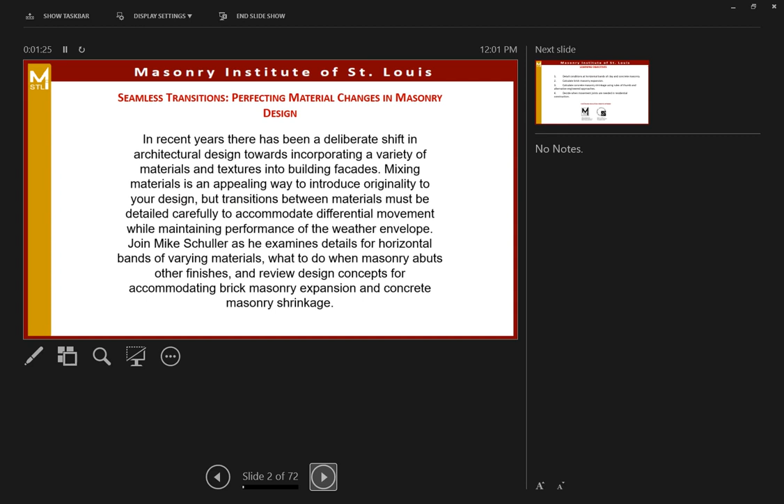We have our seminar on seamless transitions, perfecting material changes in masonry design. You can see this is our program description, it's right there in your packets as well, and you'll see our learning objectives. We're going to detail conditions and horizontal bands of clay and concrete masonry, calculate brick masonry expansion, calculate concrete masonry shrinkage using rules of thumb and alternative engineered approaches, and decide which movement, or when movement joints are needed in residential construction. This course is offered with AIA.

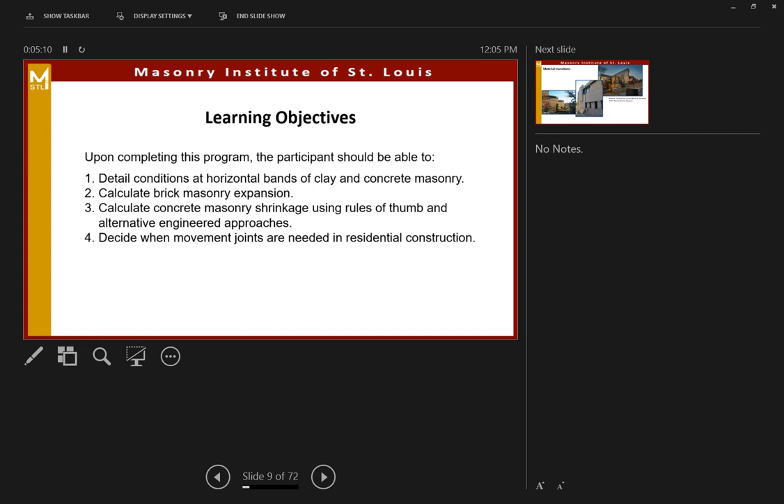That's important. So talking about transitions, what we do between different building materials, and we've gone through our learning objectives, we've seen that already, but I've got a couple images of some recent winners of Masonry Industry Design Awards. These came from the Mason Contractors Association website. And if you look at the winners in recent years, almost all of them have this mix of many different materials in their facades. So it's kind of a recent architectural style, last 10, 15 years or so, trending towards mixing these materials. So here we see stone, we see brick, we see concrete block in our masonry materials, but also putting in metal, wood, and concrete elements.

And you can do this.

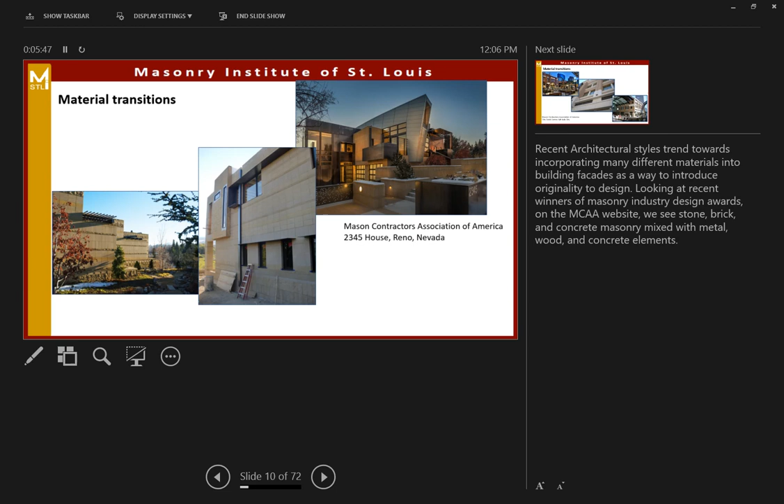You can mix these materials in these ways, and it gives a nice attractive appearance, but we have to be aware that there are some special design considerations to worry about. Our materials are going to move differently in response to temperature, moisture, and loads. Our job as designers is to be aware of these different movement concepts and detail our transitions to accommodate that movement, but also keeping water and air outside of our building.

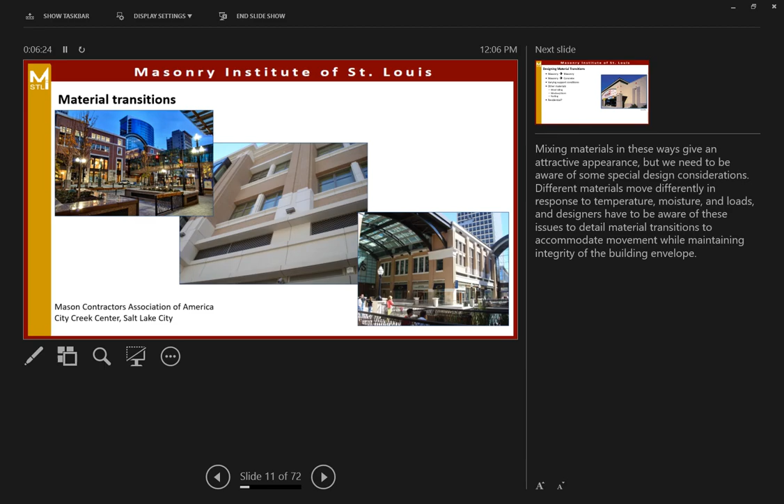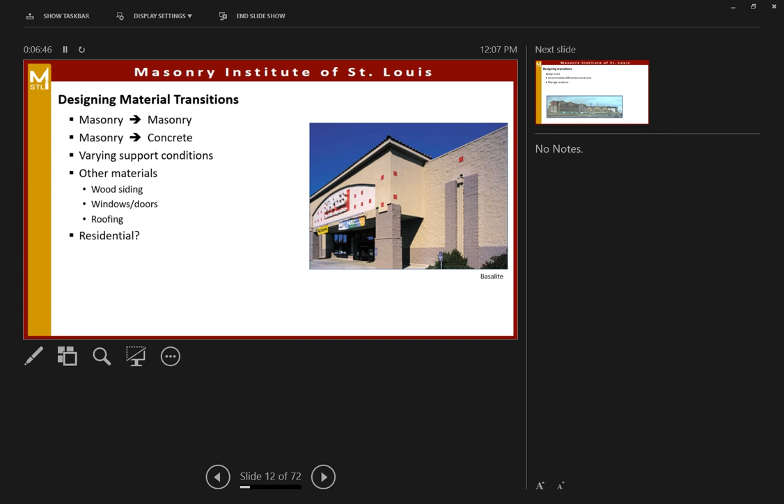So we're going to talk about detailing quite a bit today. Here's what we're going to talk about: different material types, transitions between different types of masonry to concrete, different support conditions, and a little bit at the end about residential, more of an editorial comment than a technical one. We'll get to that later.

So as I said, there are two keys to designing our transitions properly. We're going to accommodate movement, differential movement we call it, and deal with moisture. And we're looking at what is the standard of care these days, and what does the building code require.

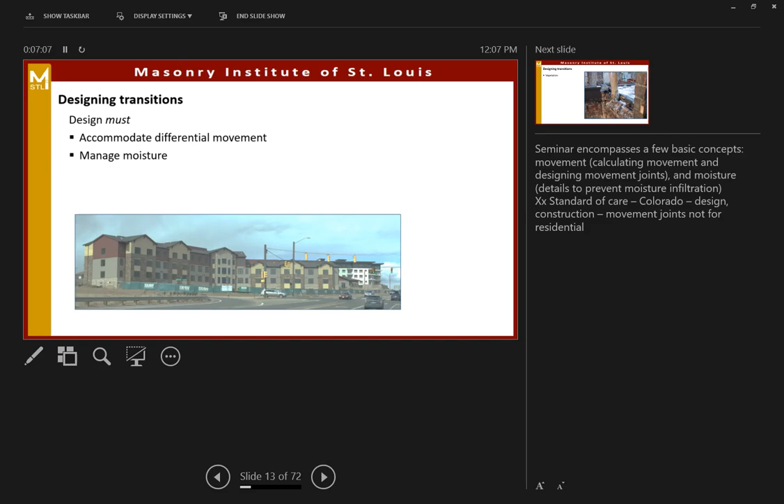We're not going to talk about transitioning to vegetation. We don't want to put these things in our walls. Gosh, I can't imagine what's going on inside that building. It's a garage, an old garage, but vegetation growing out of our walls.

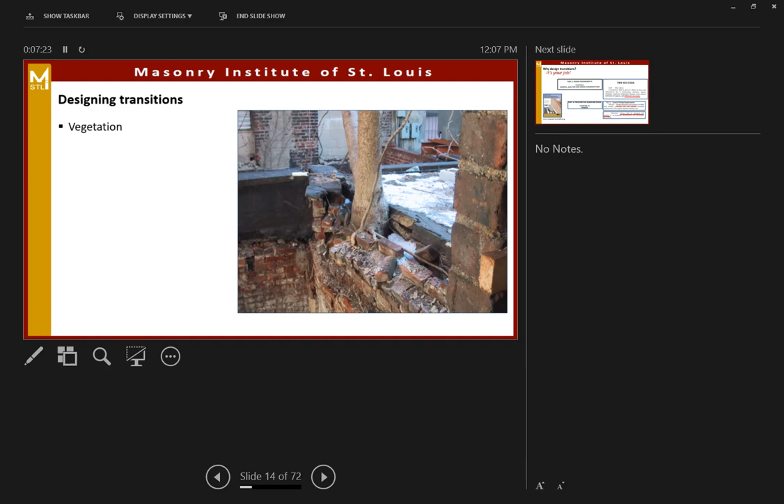So why are we designing transitions? Well, we do it because the building code says we have to. It's our job. There are three spots in the TMS 402 code, that's our building code requirements for masonry structures. We've got way up in chapter 4, general design requirements, it's our job to consider all these things, including differential movement.

And in chapter 13, this is our 2022 code, our veneers are in chapter 13 now. We're going to design and detail our wall systems to meet the requirements of the legally adopted building code. It used to be simpler — it used to say design and detail our veneer with flashing and weeps. Now we're just meeting building code.

We're also going to design and detail our veneer to accommodate deformations, differential movement. So we're doing these things because we're required to, plus it keeps us out of trouble. And we're going to spend a bit of time today on this.

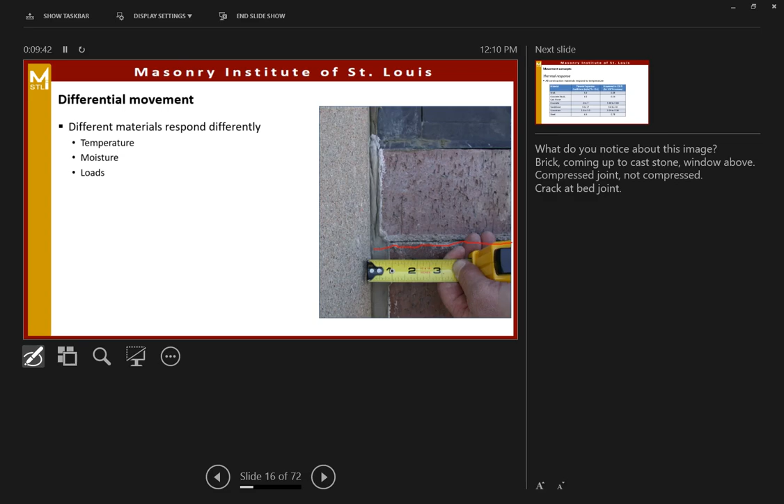The sill is moving separately from the brickwork below. So that crack can let in water. As long as we have our drainage cavity detailed properly, we've got flashing, weeps, and all our things down in the cavity, we can deal with that water that gets in at that separation.

So there are two main types of movement. Number one, we have temperature response — our building materials move in response to temperature changes. Here's a nice little table of different thermal expansion coefficients. These are in millionths of an inch per degree Fahrenheit. It's kind of tough to look at numbers.

We're going to look at this last column here. What I've done is put in a design temperature differential of 100 degrees Fahrenheit and calculated the movement in a 100-foot length of wall, just as a kind of realistic number. So our brick and our block under a 100-degree temperature change is going to expand about half an inch.

Concrete a little bit less. Sandstone has a pretty wide range of movement potential — it depends on the type of sandstone, if you have a quartzite binder or a clay-type binder. Limestone numbers come from the Indiana Limestone Institute. The brick and block numbers come out of the building code. So we have a range of movement, about a half an inch every 100 feet, maybe more with concrete and sandstone, limestones all over the place depending on what type of stone you have.

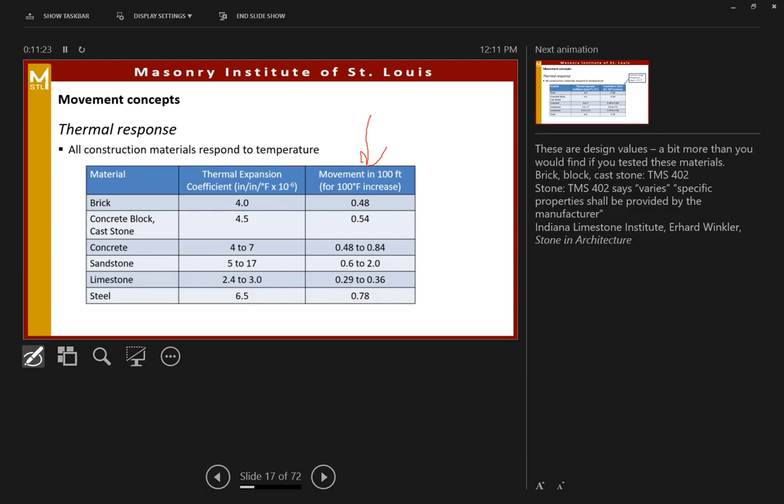Steel also moves in response to temperature. And if that steel is rebar encapsulated in grout inside our walls, it's no problem — the thermal expansion of the rebar is close enough to our surrounding materials that we don't have to worry about any cracking there.

But if something different happens, if we have our steel elements exposed to the exterior - I've seen this on supermarkets, here in an automotive repair shop - look at all those garage door openings, each one about 12 feet wide. We've got 1, 2, 3... we've got 5 of those, about a 60-foot run of steel framing there.

And the designer did a great job designing movement joints. We'll get into that a little bit later, but we've got movement joints. See the shadow lines at every little pilaster above the openings. So the brick's in great shape there.

But think about that steel lintel that is exposed to temperature. It's going to heat up and cool off much quicker than that structural brick around those openings. And so we're starting to see some movement, particularly where those steel beams are tied into the surrounding brickwork.

What happened here is we've got the steel shrinking and expanding in response to temperatures. The design had these rigid studs tying that steel into the structure around there. And if you look close, you can see some cracks. We've got cracks around here, we've got cracks around this location. So again, differential movement - steel is moving differently than the wall.

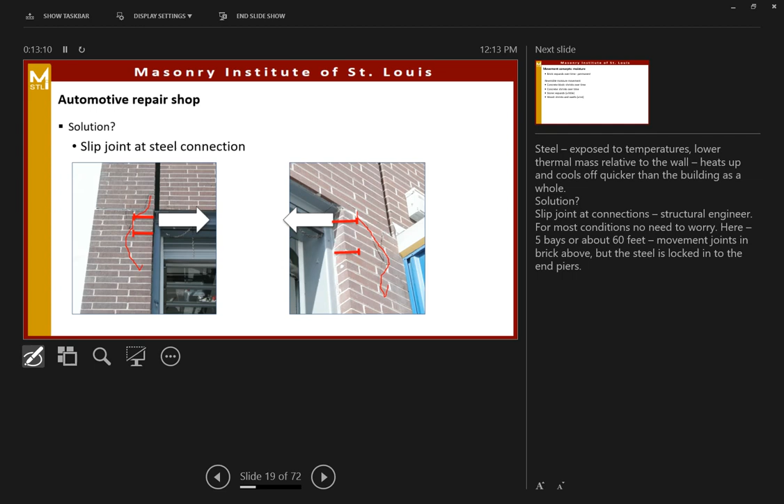What's the solution? Well, we came in and cut those studs free. Up here we put in a little slip angle connection, just a bearing seat for that beam, so that the steel and the brick above it can move independently back and forth, independently of the structure itself. So we've got to think about this - it does come up from time to time.

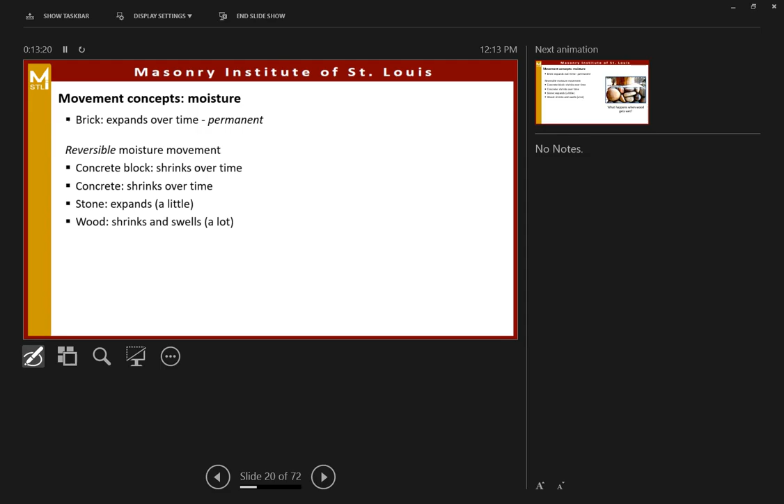So our cement-based materials have a tendency to shrink over time. As they lose moisture, as the cement hydrates, there's a chemical reaction with the cement that tends to cause those cement-based materials to shrink. So it's concrete block, it's concrete.

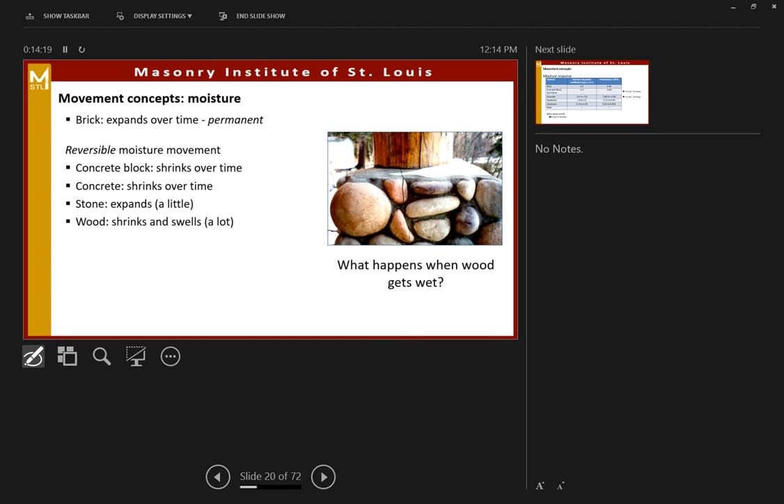Brick expands over time, okay, we know it. The second that brick leaves the kiln, all the moisture has been driven out by the high temperatures of firing. So that brick, once it's out of the kiln, is absorbing moisture out of the air, out of the environment, and it tends to expand more than you'd think. A little tiny bit, but more than you'd think.

So if we look at our movement concepts, our moisture-related movement of these different materials - our moisture expansion looks like this, a similar table. There's no temperature involved, but this is just inches per inch times 10 to the minus 4. Again, those numbers don't mean much on their own.

So let's look at the third column. If we have a 100-foot length of wall, our brick is going to expand a little less than 3/8 of an inch due to the moisture uptake. It doesn't ever shrink again - this is a permanent, one-time, irreversible expansion.

Block, concrete, sandstone, limestone - block and concrete tend to shrink over time, about the same order of magnitude, but instead of expanding like brick, it's shrinking a little more than 3/8 of an inch over its life. So this differential movement is important to keep in mind. Wood, we'll talk about wood in a moment - got some things to think about with wood.

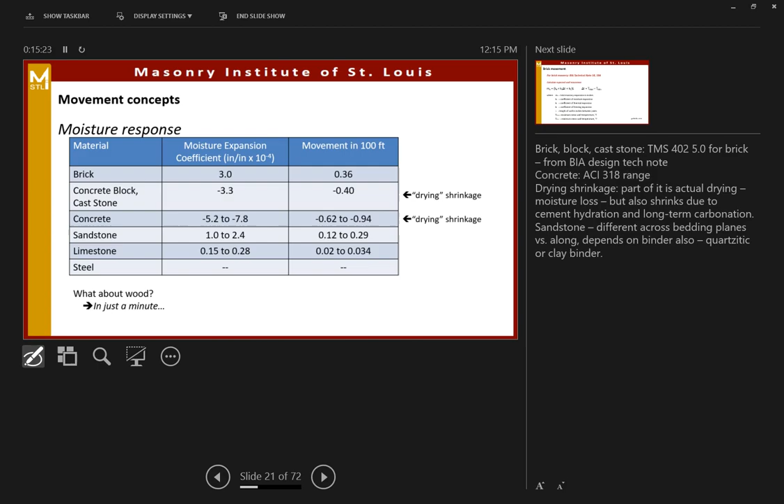So for brick masonry, if we're calculating our brick movement - again, this isn't supposed to be a seminar on expansion and movement joints, but we have to understand it. So we've got brick masonry - my best design guide for you is to go to the Brick Industry Association on their website and download, for free, their technical notes. Technical Note 18 and 18A talk about movement joints in brickwork.

And they have a pretty straightforward calculation. Our movement is related to coefficient of moisture expansion, our coefficient of thermal expansion multiplied by a temperature range. There's also freezing expansion.

Most of the time, though, we don't take it into account, because for that freezing expansion to occur, the brickwork has to be more or less saturated. That doesn't really happen in service, so unless you have a parapet or retaining wall, we don't take into account freezing related expansion.

For our change in temperature, a lot of times we'll use 100 degrees Fahrenheit as a suitable design temperature variation in an example here. Some people use 140 degrees, but I think 100 degrees is a nice round number that we can understand.

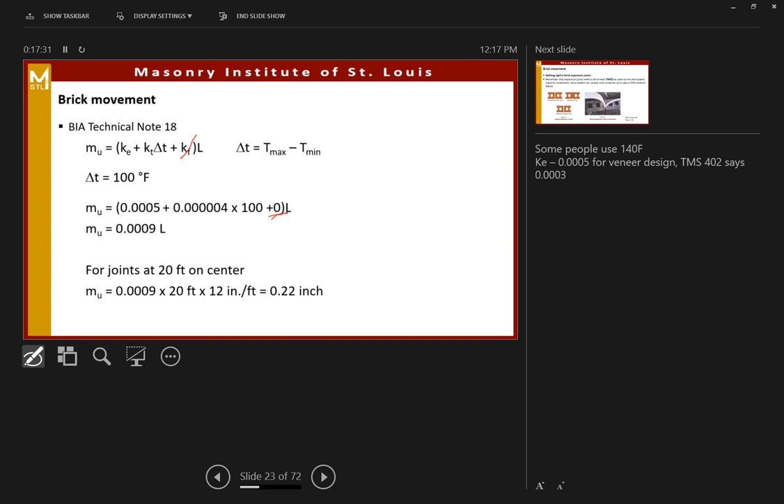But also that 0.22 inches is a very real number. Brick does expand like that over time, and that means with brick we have expansion joints. If we're detailing expansion joints, we've all done it, right? We know expansion joints have to be free and clear of any material that's going to block that movement, so we can't run joint steel through that expansion joint.

We're going to cut that steel short. We can't have mortar, we can't have wood filler strips or anything in that joint. About the only thing you can put in a brick expansion joint is something compressible, like a foam pad or neoprene pad. Best option, just leave it open. We're going to seal it at the face of the wall with sealant and backer rod, like we have here in that detail, and that gives us a space for that brick to expand into.

What's the mantra? This is always on the test later—now, we don't have tests, but when we're teaching students, yeah, it's always multiple choice. It's really simple: brick expands.

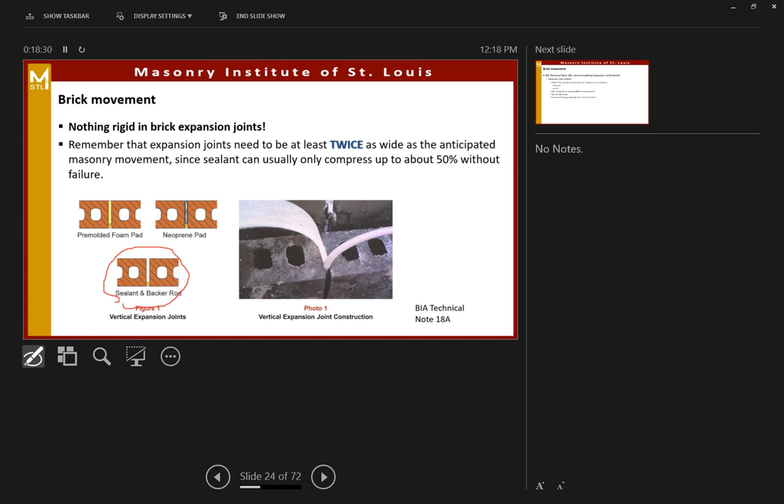What kind of sealant are we going to use? Well, grade NS—what's NS? Non-sag, right? What about use type M? What's the M stand for? A lot of people say M means masonry—well, kind of, you can say that. Use type M just means that sealant has been tested in conjunction with masonry mortar, using the standards and all that. But use type M for masonry.

Most of the time, a class 50 joint sealant is what we want to use. That class 50 tells us that sealant can compress by 50% without causing any failure of the sealant. So from a compatibility standpoint, we'll use silicone sealants very often for brickwork. Polyurethanes also work, polysulfides I don't know—I don't see those around as much anymore, but the longest lasting is usually going to be a silicone type sealant.

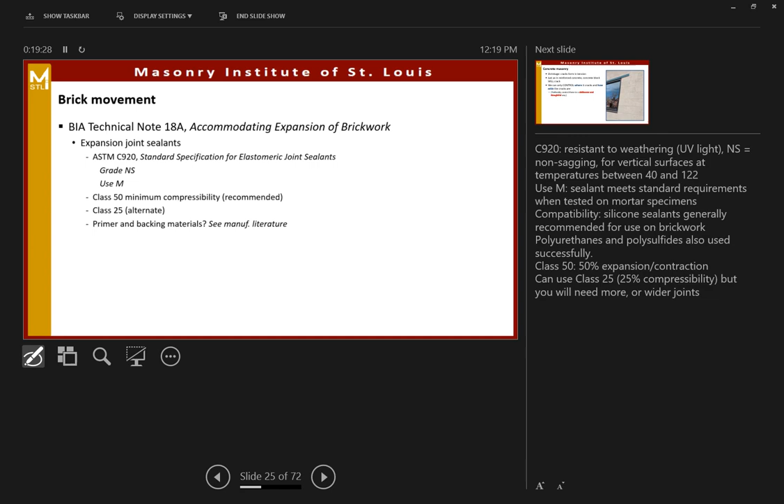So let's think about that—that's brickwork. Concrete masonry does not expand over time. Concrete masonry actually sees a net shrinkage over time.

We can see a crack that's formed at the edge of this lintel—look, you can kind of see it on the screen, I'll draw it in here. Our shrinkage cracks tend to form at areas of stress concentration around openings, windows, and lintel bearings like we see here.

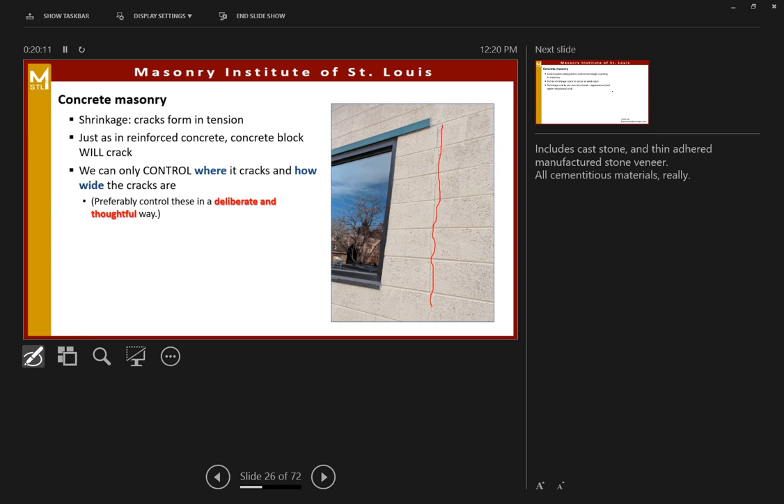Our job as designers is to understand that movement, that shrinkage, and there are some special design steps we have to take to make that shrinkage occur where we want it. We want that shrinkage to happen at control joints, different from expansion joints, so we have control joints that are really just a weak spot in the wall.

Unlike expansion joints, where we need a space for the brick to move into, with concrete masonry we're just going to form a weak spot in the wall so that when our block shrinks, the movement occurs right there where we can deal with it.

Nice, NCMA—well, actually it's CMHA now. It's going to take me forever to relearn that, to relearn what's in my brain. How about: Masonry and Hardscapes Association, Concrete CMHA.

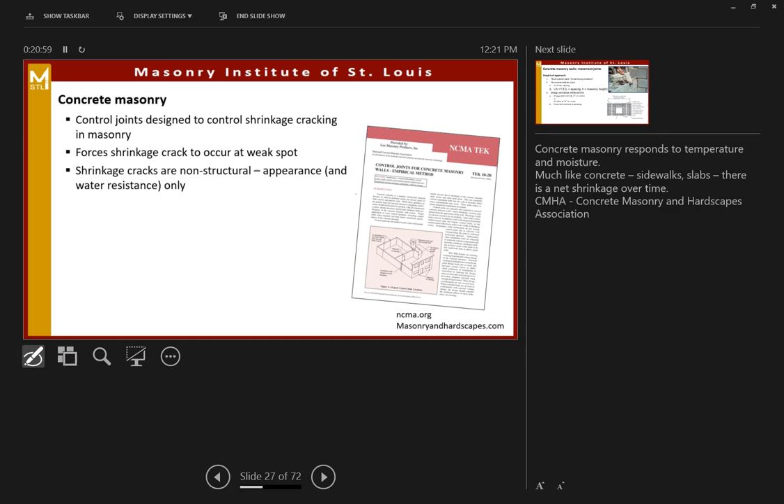Look at their website, you can download—they have a couple of nice tech notes on designing movement joints for concrete masonry.

There's two approaches. The empirical approach, meaning we don't have to do any calculations. We like this approach, and it works just fine.

We're going to start by putting our concrete masonry control joints where we need them, a little bit more on that later. We're going to put intermediate joints at a 25-foot max spacing. What's wrong with 25 feet? Concrete masonry, not modular. Right, so they've changed it recently to 25'4", so right down in your little slide, 25'4".

That's our maximum spacing for control joints in concrete block walls. Modular, working off of an 8-inch module with CMU. So we're going to split up our walls in these 25-foot segments. We're also going to make sure that we split our walls up into rectangles where the length or the spacing between our joints is no more than 1.5 times the height of our wall. So if you have a 10-foot wall, 1.5 times that is 15 feet, we're going to put our movement joints at 15 feet on center. These little rectangles.

The third step is designing and detailing reinforcement. We're going to double up on our joint steel like we see in this detail below here. We're going to have joint steel above, 2 courses above. We're going to have joint steel 1 course below our opening, and we're going to put vertical bars at each jamb. We know that stress concentration at that window opening is going to force cracks to form there. So we put additional reinforcement there to limit the opening of those cracks. And generally, 9-gauge joint steel at 16 inches on center is kind of the standard.

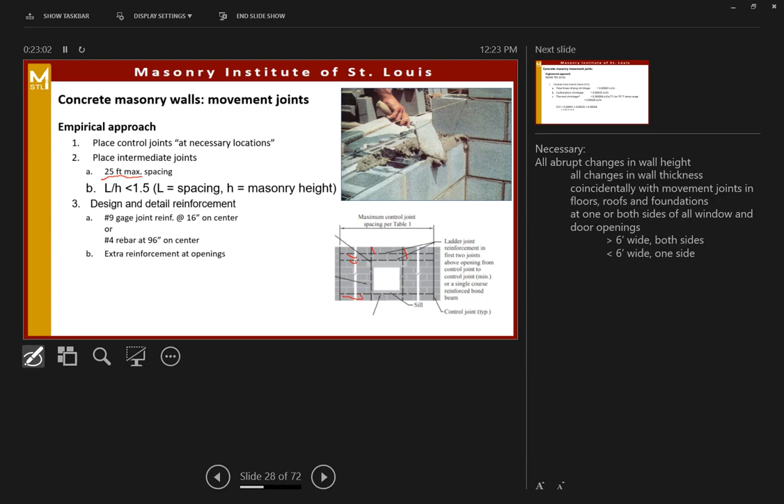Pretty simple. We can also follow an engineered approach. That means we actually calculate the amount of shrinkage, we design our crack width, and we know our steel to accommodate or to limit our crack opening.

There's 3 types of shrinkage that we have with concrete masonry. There's linear drying shrinkage. When concrete block are made, it's a dry cast mix. There's not a lot of moisture in there, but there is moisture associated with the block and with curing. So as that block loses moisture, and as the cement hydrates, there's shrinkage. That happens in months or so after manufacture.

The second component is carbonation. That's a long-term action, as carbon dioxide gets sucked out of the air into the cement byproducts within our block. There's a carbonation-related shrinkage that happens months and years down the road. And there's thermal shrinkage as well. For whatever reason, we use a different temperature range for calculating shrinkage, about 70 degrees.

And we come out to, bottom line, the CCC, this crack control criteria, about 0.00118 inches per inch. What does that mean? That same 100-foot wall, we're going to have about 1.4 inches of potential shrinkage. A lot of movement in a 100-foot wall.

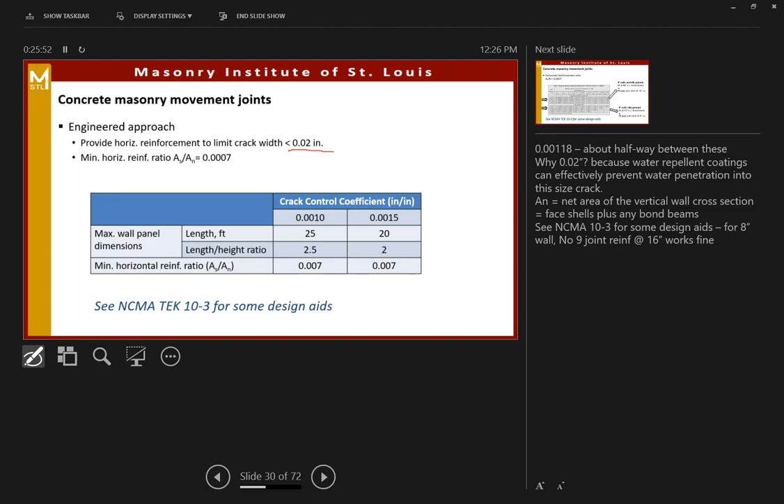Engineering, I tell you what, we can go through these calcs. There's a better approach though. NCMA Tech Note 10-3 has some design aids, a big table full of numbers.

The key is you run down this table, like here I've got an arrow for an 8-inch block wall. Our 8-inch block wall here. Bottom line, if we're using 9-gauge joint steel right here, for an 8-inch partially grouted or ungrouted block wall, we're going to put in 9-gauge joint reinforcement every 16 inches on center. That's pretty standard. So every other course up the height of the wall.

The other arrows down below, that's for a fully grouted wall. We need more reinforcement in there if we follow this engineered approach. So we need 8-gauge joint reinforcement at every course, every 8 inches up the height of our wall. So I think the bottom line is, we're used to putting joint reinforcement every other course, 9-gauge, in our walls. Perfect. This engineered approach really just proves what we've been doing for years and years.

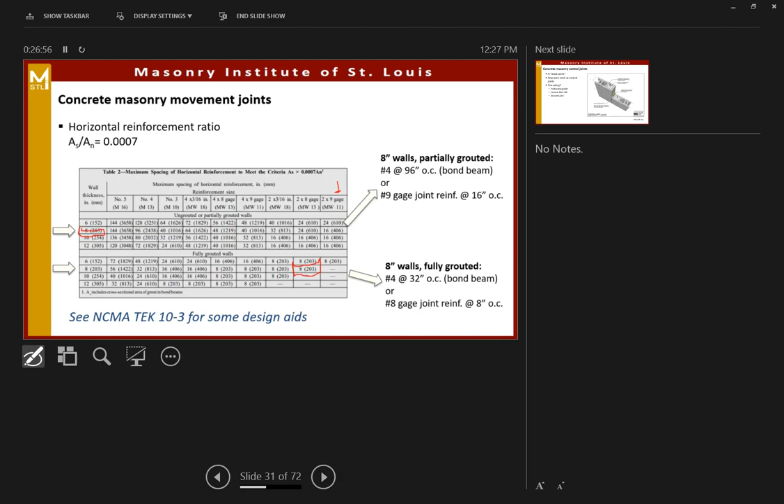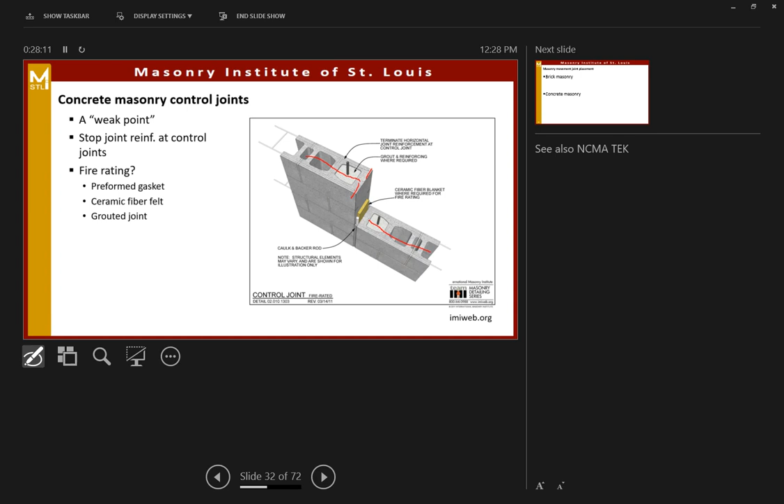So expansion, shrinkage, right? This is always on the test. Brick masonry expands or shrinks.

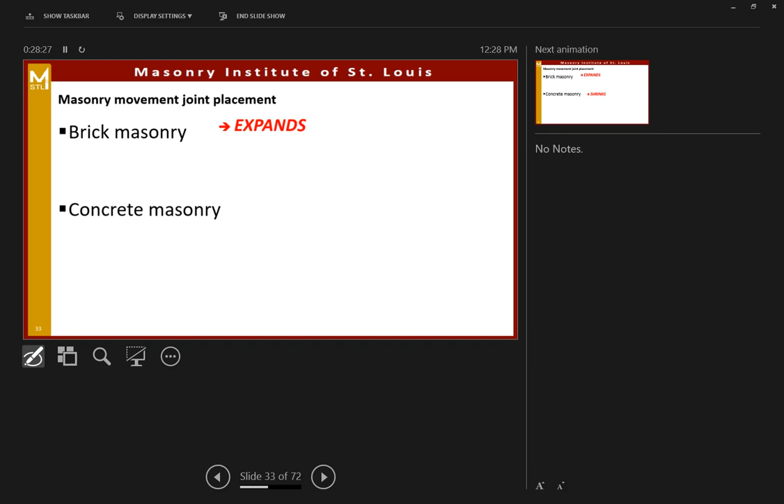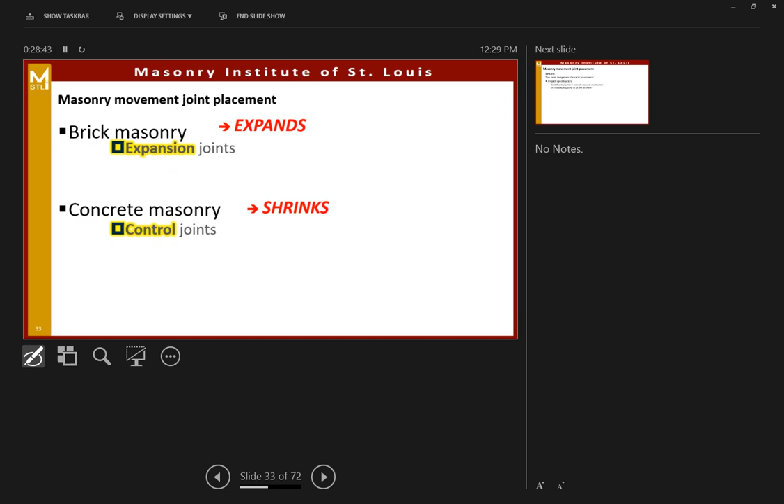This is the class participation component of today's seminar. Brick masonry expands, concrete block shrinks. You can follow, you can cheat, it's okay. So we're going to put expansion joints in brick masonry and control joints in concrete masonry. They're different. A control joint's different than an expansion joint. So let's get the terminology right.

Now this is something I talk to contractors about as well, and I pulled this out of one of my contractor certification classes: if you see this in your spec, be aware this is going to cause you problems. Project spec says install control joints in concrete masonry at a maximum spacing of 25 feet on center.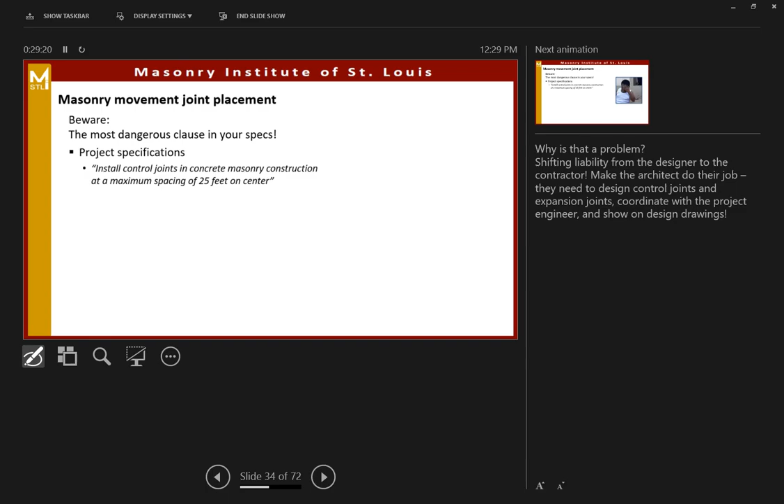Why is that a problem? Well, number one, Mr. Contractor, it's making you the designer, shifting that design responsibility from whoever should be designing those control joints, usually the architect, and putting that on you. Plus, you got to think about things like, where am I going to start? Do I start at the corner? Do I start 25 feet off the corner?

Do I put them at windows, every other window? Listen, we should have elevation drawings. We should have them on plan views showing exactly where every control joint needs to go on our walls.

As I stated earlier with the concrete block, we're going to start with putting control joints where we need them, at our corners. Usually I like them right at the corner, not within every 10 feet. Say we want it right at the corner. So if you've got an 8-inch block wall, I'll put that first joint right here at the corner, down here, rather than 10 feet off, but that's my opinion. The industry says within 10 feet of the corner.

Wall returns, offsets, intersecting walls, underneath shelf angles. A nice detail here right out of this tech note shows you all the places where we want movement joints, control joints. What about windows?

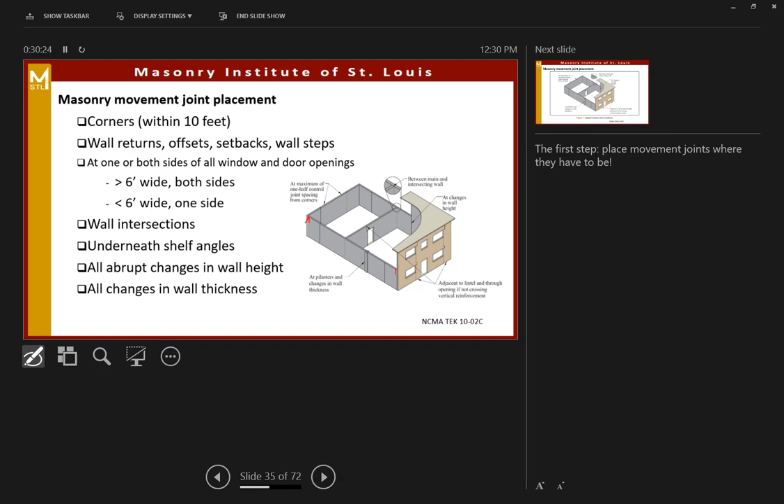They're showing the control joint kind of stepping around our lintel bearing, if you follow it up here. Another approach is to put it vertical, maybe 8 inches off our window. I'll see some people put those joints centered in the piers between windows. Whatever you do, the concept is just run them up and down, recognizing that we have stress concentrations that can attract cracks.

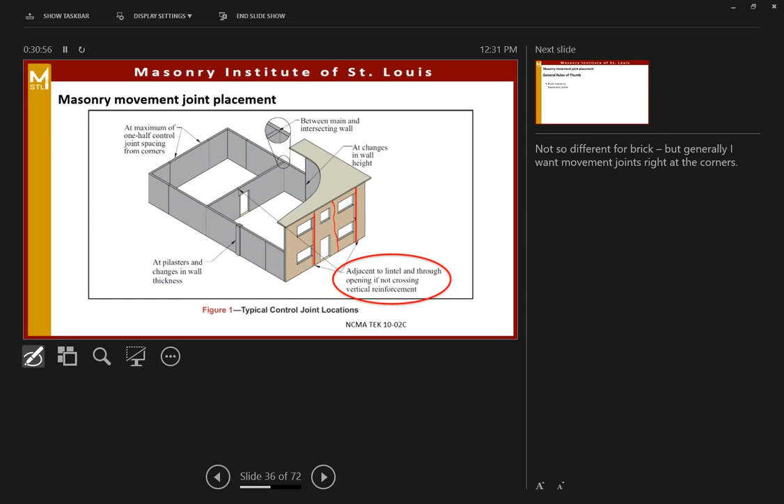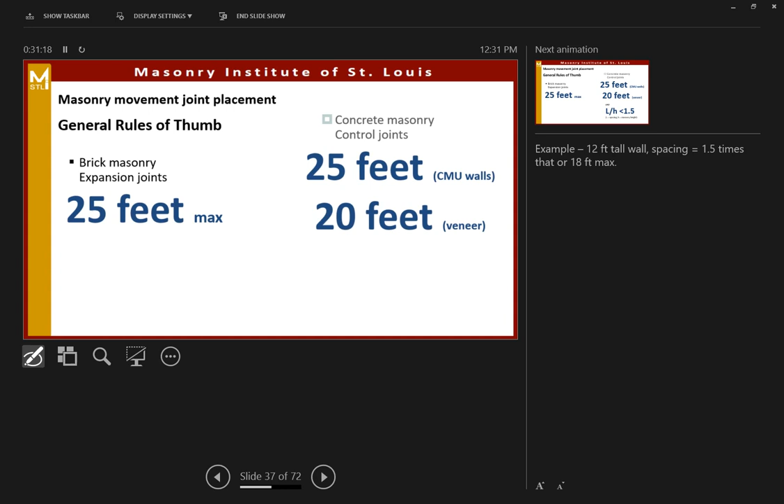So all of this 20 minutes of discussion about movement joints comes down to one slide. Brick masonry expansion joints, 25 feet max on center. Modular, we're going to go 25 feet 4 inches. Concrete masonry control joints, 25 feet in CMU walls. There are some references out there that want to cut that down to 20 feet in veneer. And again, modular is 25 feet 4 inches.

Couple of other things to think about. We're going to split our walls up into rectangles with an aspect ratio of 1.5. Spacing between joints, 1.5 times the height of our wall. And finally, parapets, fences, areas with severe exposure, we're going to cut down that spacing by half.

Why do we do that? Well, they're seeing temperature, think about a parapet. It's seeing moisture on both sides of the wall. It's seeing temperature on both sides, so it's going to move a lot more than a vertical wall of a building. Fences have no conditioned space on the backside, so again, fences move around a lot more.

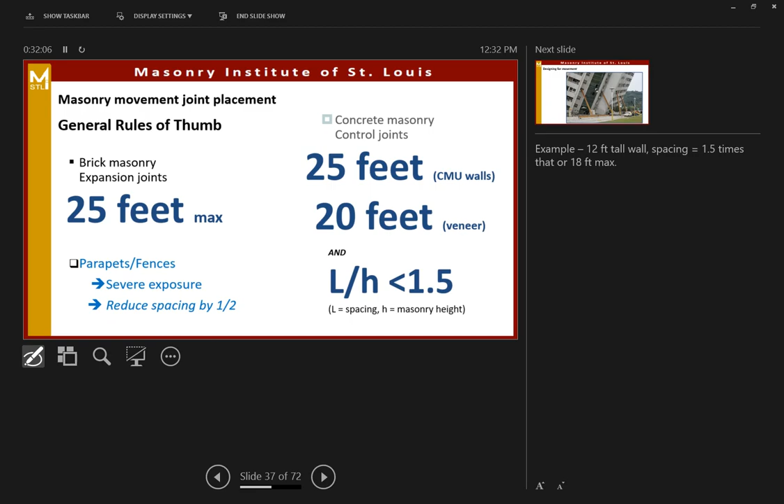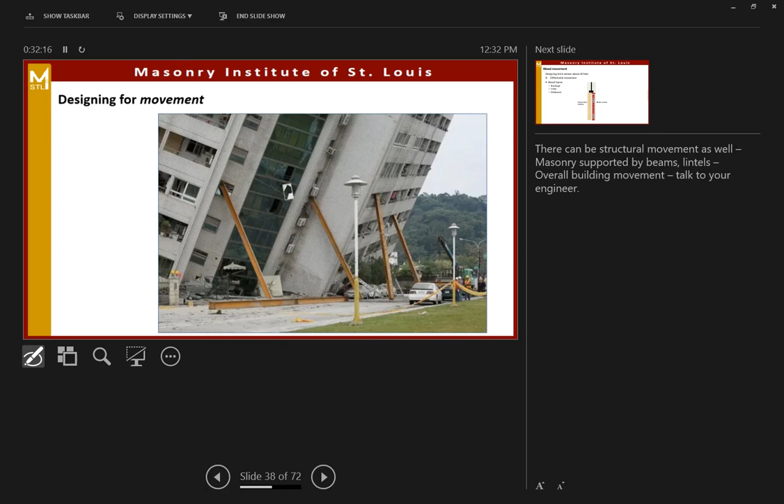Okay, designing for movement. Buildings move. Look at this concrete building, it knows how to move. This is earthquake, liquefaction footage, I think from Japan. Fascinating.

We talked about this concept earlier and mentioned we'd cover wood later. Here we are on the wood part. I took a few slides from a nice class by the Rocky Mountain Masonry Institute on podium type construction, where you have concrete block or concrete for the first couple of stories and then wood frame above.

There's an issue with what we're doing with masonry veneer these days, because building code now lets you go more than 30 feet above the foundation with brick veneer on wood stud. If you're using the 2022 version of the TMS code, which I don't think a lot of places have adopted yet but it's coming, we can go up to 50 feet now.

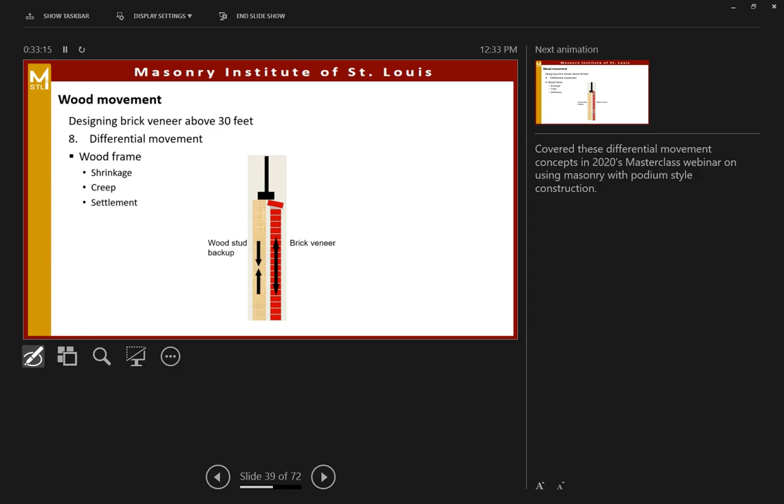What's the issue there? Well, we just learned brick expands over time, right? Our brick veneer is expanding. We know that wood frame and wood stud construction shrinks over time. So think about the differential movement. Brick expands and wood frame shrinks, and that can lead to very real movement.

That's going to tip our roll-lock sills and roll-lock caps back, and we see it in practice. It'll press us so much we can actually pop some of the sheathing off if it's not anchored correctly. So what do we do here?

Well, I like industry publications because it's not just my opinion, it's the best minds in the industry put together by the Brick Industry Association. When was that published? I want to say 2018, 2019. Since we can go over 30 feet now, the code says we have to design to accommodate this differential movement, and this brick brief published by the Brick Industry Association tells us how to do it.

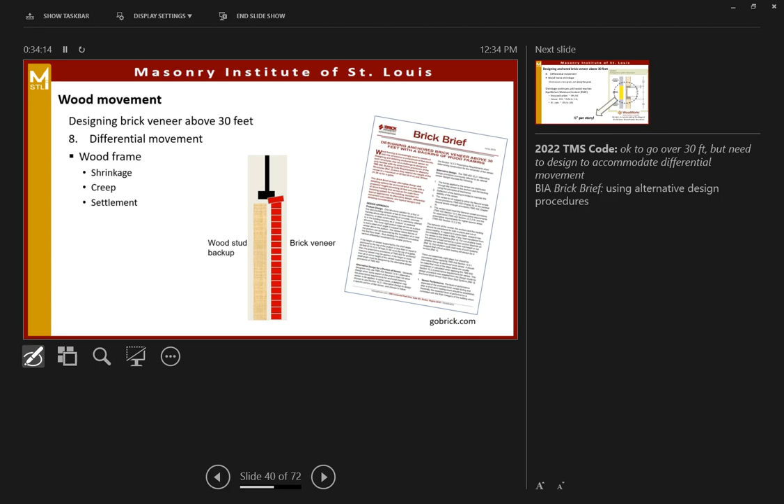It's got nice details, a nice process, and to summarize: most of our wood shrinkage doesn't occur along the length of a stud, like a 2x4, it doesn't shrink that much. It's the cross grain shrinkage that dominates movement of that backing.

So if we have a sill plate, we'll always have sill plates top and bottom of our stud wall, a double sill plate at the top, and we'll have a rim joist. Most of that movement, about three quarters of it in our wall, is taken up right at those floor lines. And it's a big number, half an inch per story.

So if you're going up 5 stories, that's 2.5 inches of potential movement between our veneer and our wood backing. That's a big deal, and it happens because when the wood comes out of the kiln, it's got a moisture content of 19%. I looked it up.

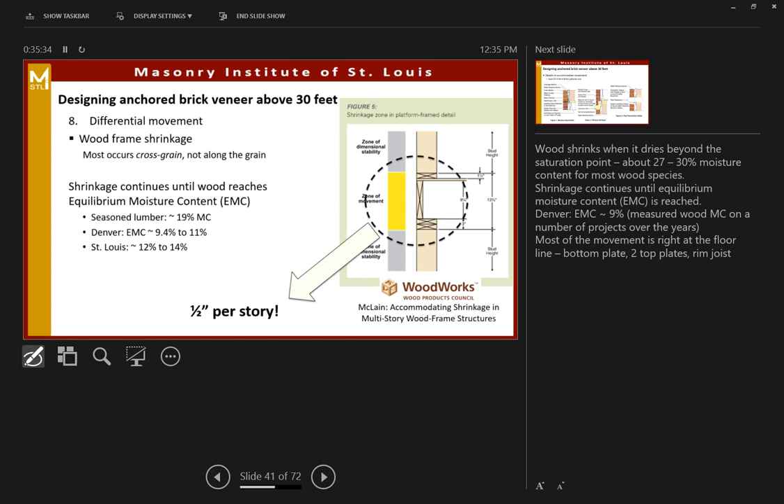In St. Louis, our equilibrium moisture content is somewhere between 12 and 14%. So as that wood loses moisture, a lot of times it's already in the wall before it's fully lost that moisture, so it's shrinking quite a bit. So how do we deal with this? 5 stories tall, half an inch per story, that's 2.5 inches of total movement we have to deal with.

Number one, we're going to put in adjustable veneer anchors, right? These are the eye and pintle types, you get the idea. Adjustable veneer anchors.

What else? We're going to have some slip joints or some way to accommodate that movement at any kind of wall penetration or interaction between the backing and the veneer. So on top of our window sill, we actually have a little metal sill with up to 2.5 inches of movement capacity, so as those two elements move differentially, we accommodate that movement.

We're going to have a slip joint around any penetration, so a dryer vent or bathroom exhaust vent going through our wood framing and our brick veneer needs some type of slip joint. I've shown it here in the veneer, but you can also have that slip joint back in the wood framing. If we don't put those in, we're going to see things getting crushed, moved, bricks getting dislodged. So be careful. Code lets us do certain things now that I don't quite agree with, but that's a discussion for another day.

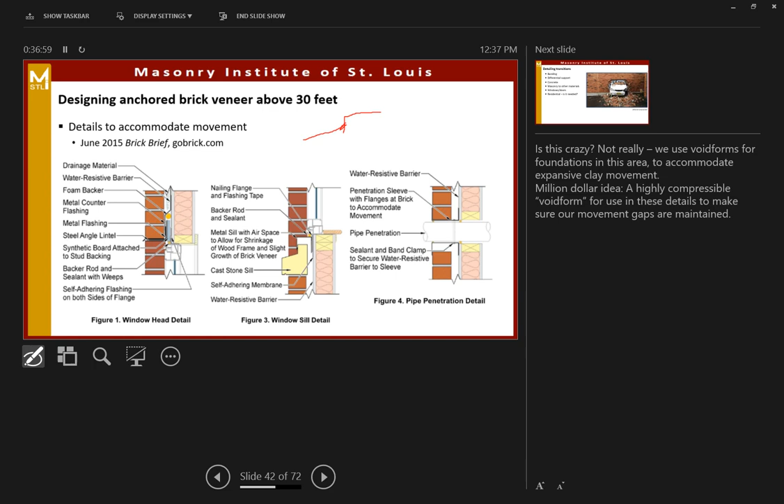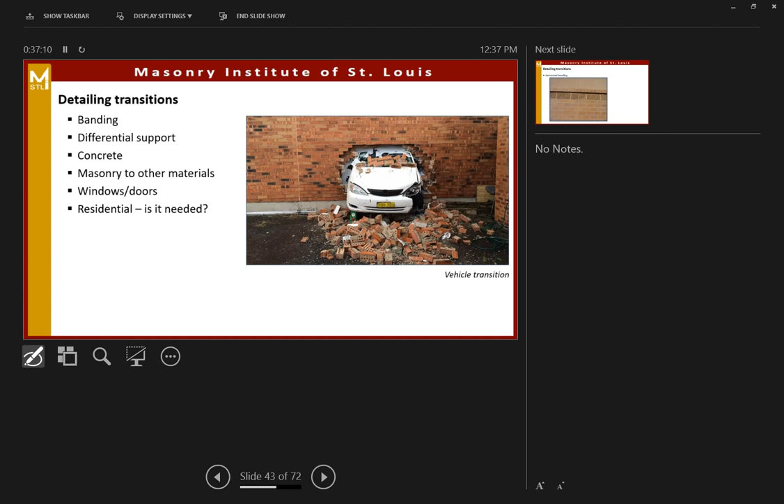All right, what else? What other kind of transition? Let's talk about transitions with vehicles - we're not covering that today - but banding of masonry, different types of supports, concrete. And we'll finish up with a little discussion about residential.

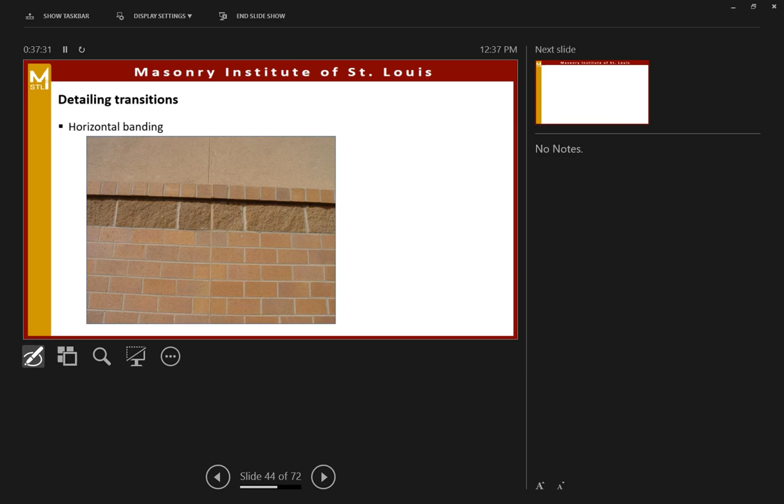Now, I love this photo. I don't know, this wasn't a project of mine. I was just walking out into the local, I think it's a King Soopers, a grocery store, and we've got stucco up above, a brick rowlock cap, a band of concrete block, and brick below that, and I love it. Look at this joint, this movement joint in between.

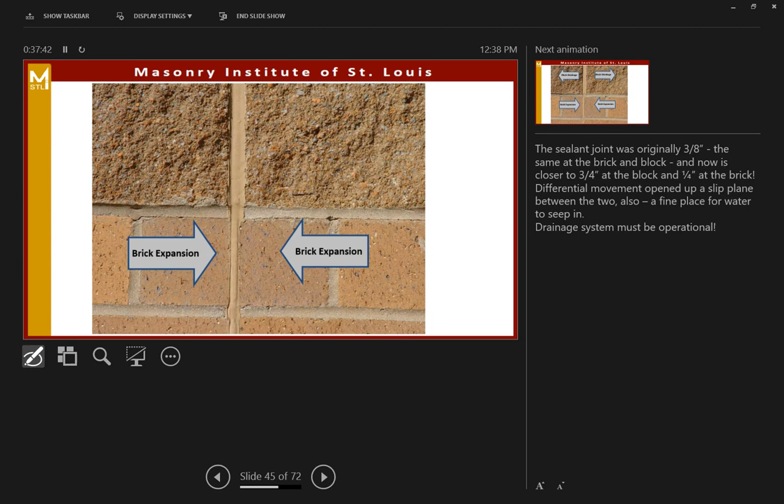We zoom in, well, what do we notice? Down at the brickwork, it's expanding towards that joint, so that movement joint's compressed. The block is pulling away from that joint, so that movement joint there is expanded. And again, if you look close, we see a little separation here.

Are we worried about that? This is just a veneer. Are we worried about that causing a structural issue? No, because we got our veneer tied to the backup. That's good. Okay, what about moisture? Better have your cavity wall details bomb-proof. You better get all of your cavity wall detailed properly, flashing weeps down at the base.

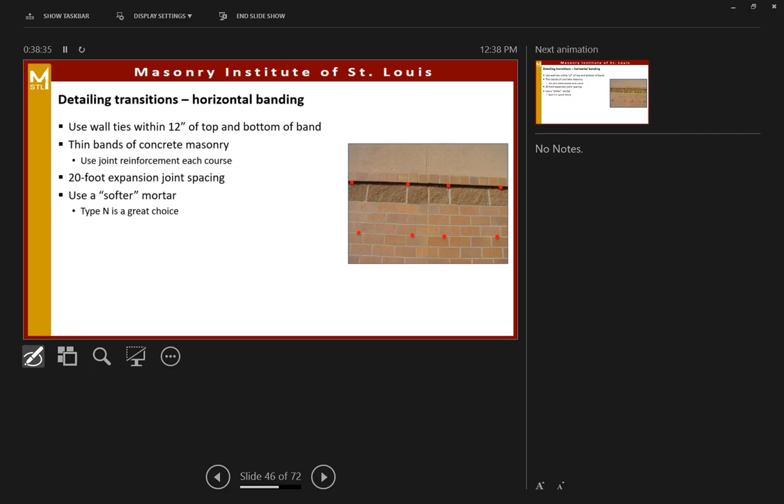There are a couple recommendations in the industry about how to control that type of movement. If we're putting a band of concrete block, which is shrinking, in the middle of a brick wall, which is expanding, we're going to put extra wall ties within 1 foot, within 12 inches, of the top and bottom of that band. That's just to make sure any cracks or separations don't affect the stability of our veneer. We're going to use joint reinforcement every course of our concrete block band - so here, just top and bottom. We're going to drop our expansion joint spacing down from 25 feet to 20 feet.

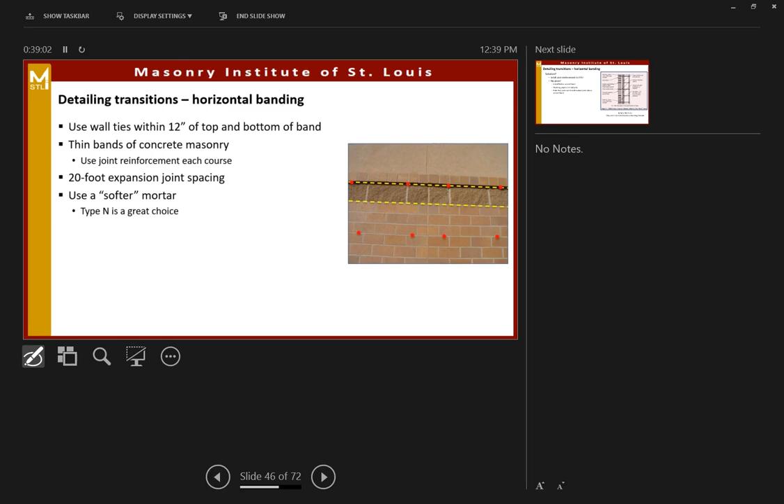And well, let's go back. We're going to use a softer mortar, like a type N mortar - it's a great choice for veneers anyways. That softer mortar is better able to accommodate movement without cracking.

So another industry detail that's out there is this one. They're putting sealant. Here's our concrete band - we're going to rake back the mortar above and below and put a sealant joint in. We're going to put a little slip, a bond breaker like flashing paper or poly above and below, because we know things are going to move. We're going to put in a slip joint, sealant, all these things, flashing and everything.

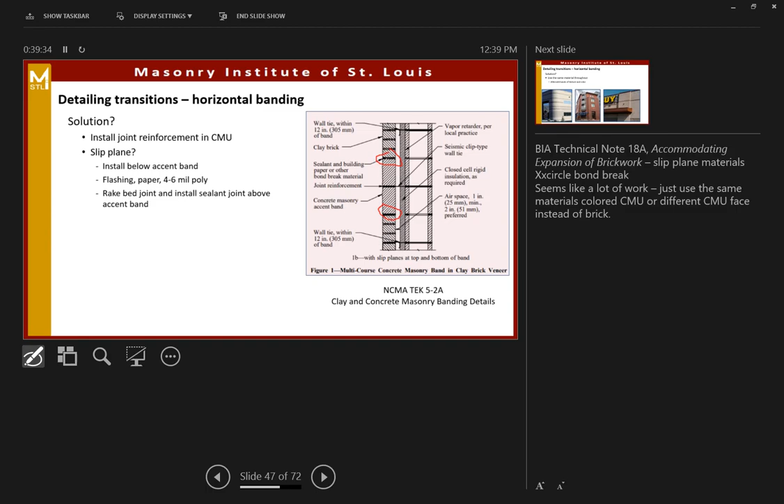I've got a better solution. What's the better solution? Just use the same material.

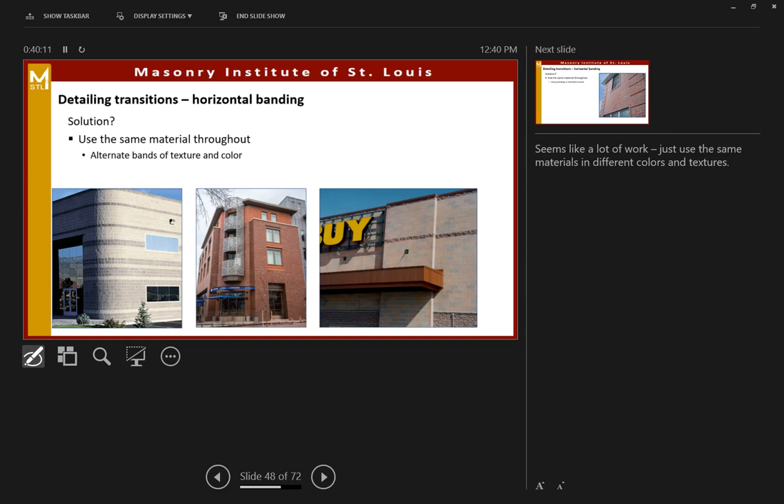Okay, we can get some really nice looks with concrete block. We've got smooth face block, split face, different colors, different textures on the outside. All of that on the left and right, those facades are built entirely out of CMU. We can do the same with brick - recessed courses, different colors of brick. So you can mix brick and block, you can mix stone with brick, stone with block, but the better idea, the more foolproof way of doing things, is just use the same material all throughout.

Just projecting in recessed courses - here, same brick all throughout, but we get a nice accent to our sills, our jambs, our window heads by just pulling that brick out from the wall a little bit. And even imitating quoins at the building corners, again, just a little bit of a projection.

The thing to worry about, to think about, is all of these ledges tend to collect water. We'll tell the mason to put a little mortar wash on there, you know, a little slope to the mortar joint to shed water off that cap.

How much of a projection are you going to put? Got to be careful if you're not using 100% solid brick. Our brick cores, those holes in the brick, can be pretty close - up to 3/8 or 3/4 of an inch away from the face. So we'll want to make sure that we limit our projections to somewhere in the 3/8 to half an inch range. Go more than that, you're going to expose those brick cores.

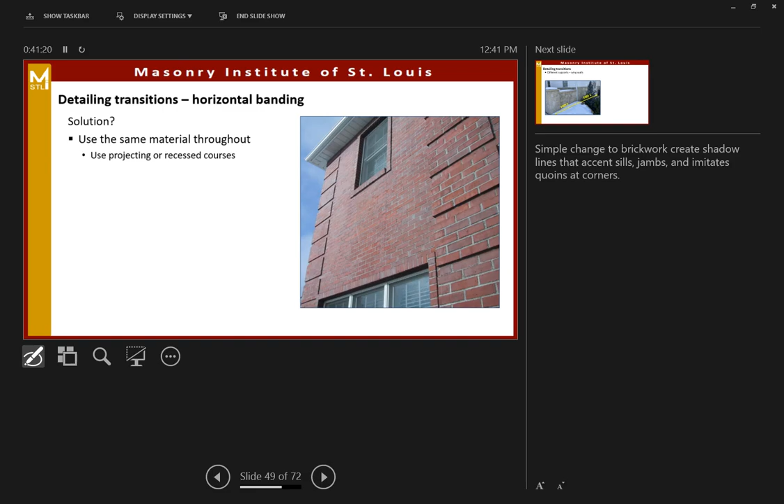And it looks bad, lets water into our wall. So limit our projections to about half an inch max - 3/8 even better.

Okay, what other kind of transitions? Well, we have transitions between different foundation systems. High-end home, structural foundation under the house, little wing wall out here, that's more of a landscaping foundation. What's going to happen along this interface? Things are moving, right? We know what's going to happen.

Detail it in. I would have detailed in a movement joint here, right at this interface, instead of now the cracks opened up. And we can just tell by the way the cracks form that wing wall is just tipping out. Again, not a problem with construction, not a problem with the structural design. We know what's going to happen - let's put a movement joint in there to accommodate it.

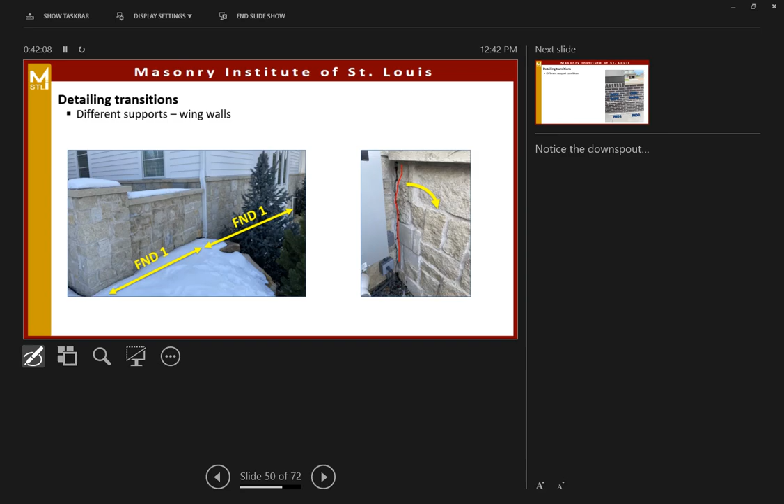So if we have different support conditions, it's actually a building code requirement, oddly enough. If we're supporting brick veneer or any kind of veneer off the foundation, like we have in this facade, all those loads go all the way down, supported by the foundation.

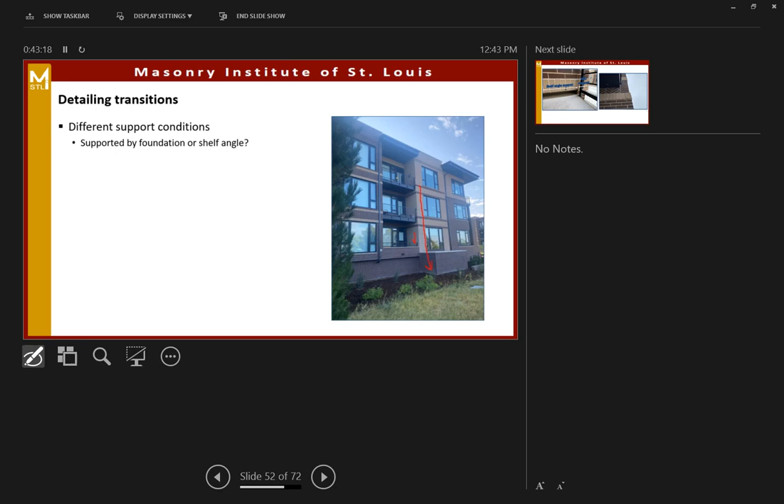What about this brick here and here and here at the return? What's supporting that brick? Well, if we look in close, we have a shelf angle on top of every balcony slab. That's great, that's a good solution. We don't want our brick sitting on that balcony slab where it's going to move around. But right around that corner, that brick's supported by the foundation.

So we have different runs of brick, different heights, different support conditions. The shelf angle's riding along, in this case, with the wood framing, and so we get a crack. If you're sitting up front, you can see it. There's a crack there. The solution, this was already built. We came in and...

Something always happens in translation. Are we putting our movement joints there? No. Draw this in. Movement joint should be here, right around the corner, right where that crack occurred. We run it here. We don't need it in the first story because all that brick's resting off the foundation. So if you're designing a building, you've got brickwork running from the foundation up to the top of the building, around the corner at your return, and supported on shelf angles, always put a vertical movement joint between the two. Backer rod and sealant, keep out water.

Transitioning to concrete, there's like 3 wrong things in this image. This is a manufactured stone veneer, an adhered veneer. For whatever reason, the veneer went on the building first, and the concrete contractor came in and put in the slab later. That slab's moved. You can see these little ghost lines, right? The concrete slab used to be up here.

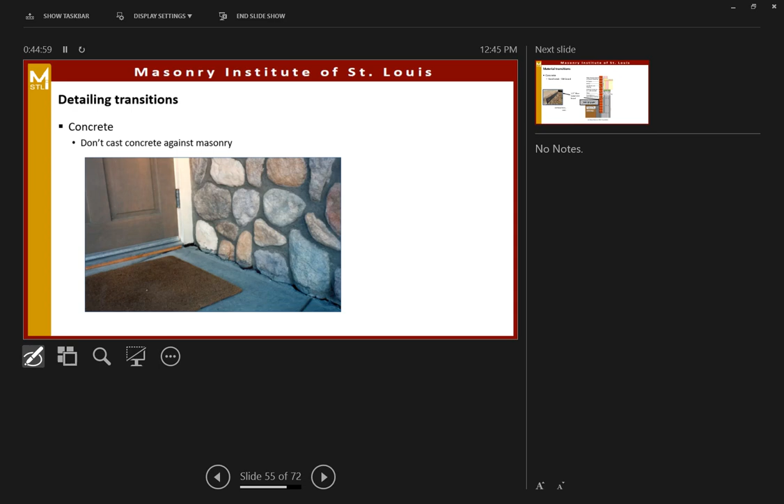What are our problems? What should we not do in this image? We're never casting concrete against brick or block or stone or anything important. Don't cast it against masonry. We're going to put a little separator, right? A little fiber expansion board in here.

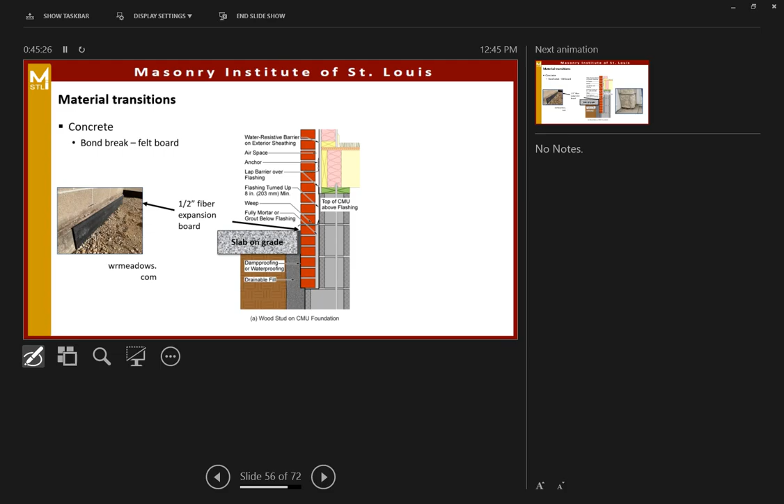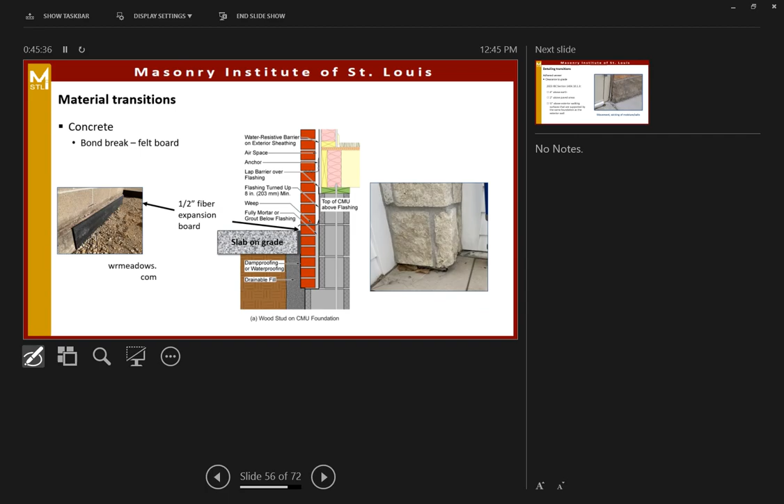Always have a separator. What's issue number 2? Well, they should have installed this adhered veneer with actually a separation between the concrete and the veneer material itself. And these are building code requirements. If we have an adhered veneer, we're required to put a clearance to grade of 4 inches, 2 inches above paved areas, or half an inch above a walking surface like a slab or pavement, as long as that slab is tied into the home's foundation. If it's not, we're back to this 2-inch idea.

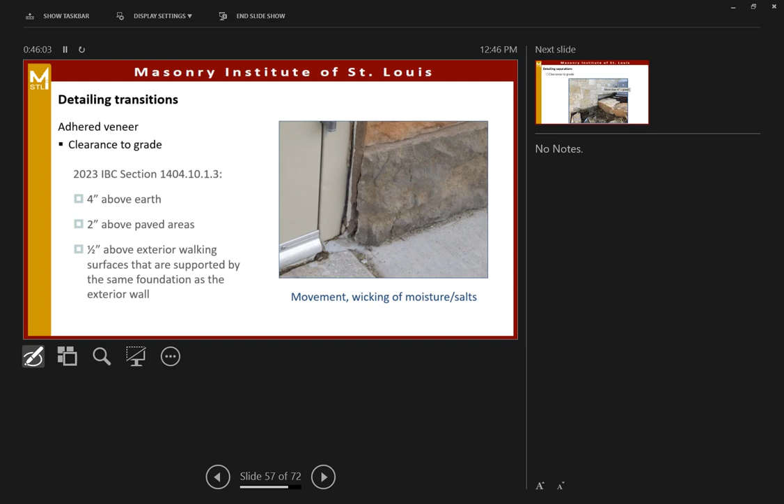And I don't know what it is, I think designers, especially in high-end homes, homeowners, they don't want to see any of that concrete exposed. You can kind of work around it, but honestly, anything that's within 4 inches of grade or less is in my mind sacrificial with an adhered veneer, because water's going to get in. It's going to affect the bond at the back of that stone, and it's going to affect our wall conditions.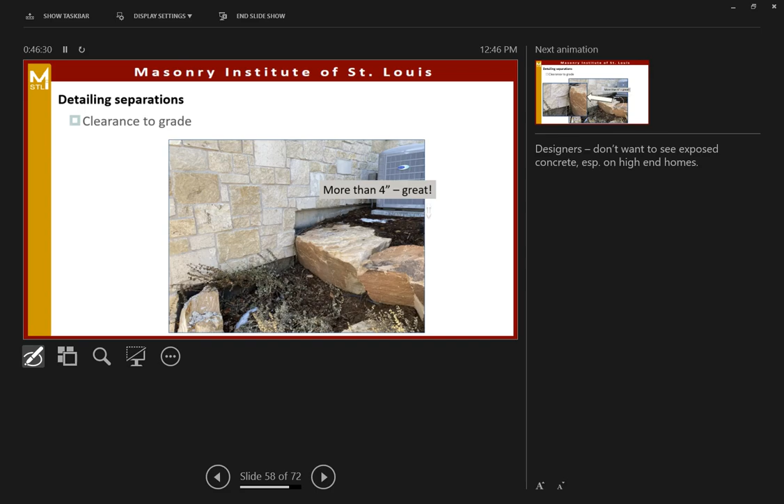And I like this image. Big old stone, right? Well, the stones always move downhill, so make sure there's separation between our landscaping boulders and our wall as well. That's caused this little unit here to dislodge and move down. So what are we going to do? Well, we're going to provide a separation from grade. If you want to get around that, I've not allowed it.

I've lived with it on a couple projects where I just tell the contractor, listen, you can put stone down to grade like we see here, but that stone is going to be sacrificial. It's going to take more maintenance. Probably a couple stones are going to fall off every year. You've got to deal with it.

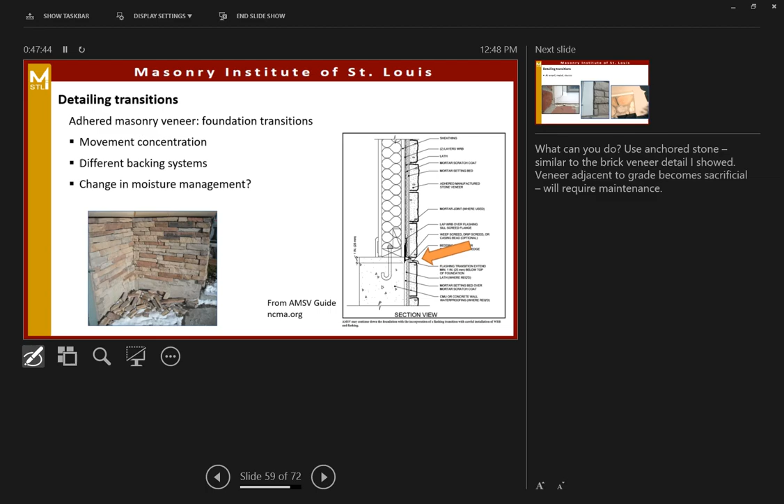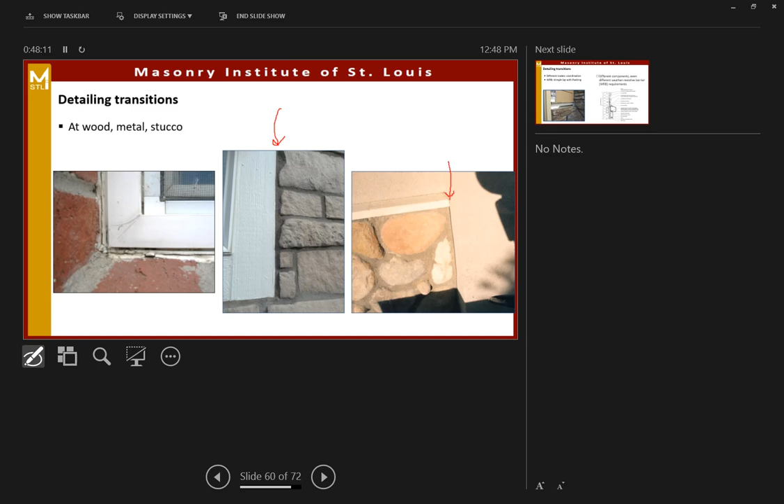What are we doing with transitions to windows, wood siding, stucco? Very vulnerable areas. What goes in at this point, well, shouldn't be mortar—we call it a transition, or an isolation joint. That could be as simple as a quarter-inch wide space with backer rod and sealant. We know these materials are going to move differently, so we put in an isolation joint around our windows and around other dissimilar materials.

Honestly, when you look at these situations—here's a horizontal transition, adhered stone veneer below to wood siding above—it's not really a design issue, it's more of a coordination issue. The general contractor is dealing with carpenters, finish framers.

Who's putting on the weather resistant barrier? Sometimes it's the GC. Who's putting on the stone veneer? At those interfaces we really need a good discussion. If you're having a pre-construction meeting, that's a good time to bring it up. Who's putting in this flashing? Are they going to put it in right? Is this right? No—it's just put onto the face of the WRB.

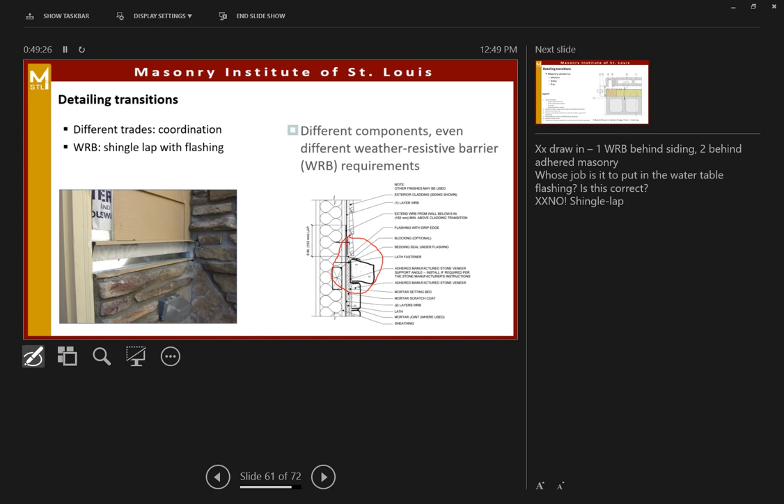We want that building paper, or Tyvek, whatever you want to call it, to lap down over the vertical leg of that flashing, so any water getting behind our siding gets caught by that flashing and directed out of the wall system. So again, this little vulnerable area right at the transition from brick or stone below to siding above—a lot of things are happening. It's a coordination issue. Let's make sure the general contractor has that covered.

Isolation joints, when we transition to windows, siding, trim—item number 3, here's our isolation joint. Again, nothing magical, about a quarter-inch space there with backer rod and sealant. This detail comes out of, by the way, you can go to—I'm from Colorado, I work with the Rocky Mountain Masonry Institute a lot—we've got on our website this free downloadable PDF design guide for Colorado masonry systems.

This detail actually shows a secondary kind of barrier back here, because this is a vulnerable spot—actually having a fluid-applied air barrier down here and a little flashing membrane wrapping the corner, so that we're keeping water out of our building and out of the insulation.

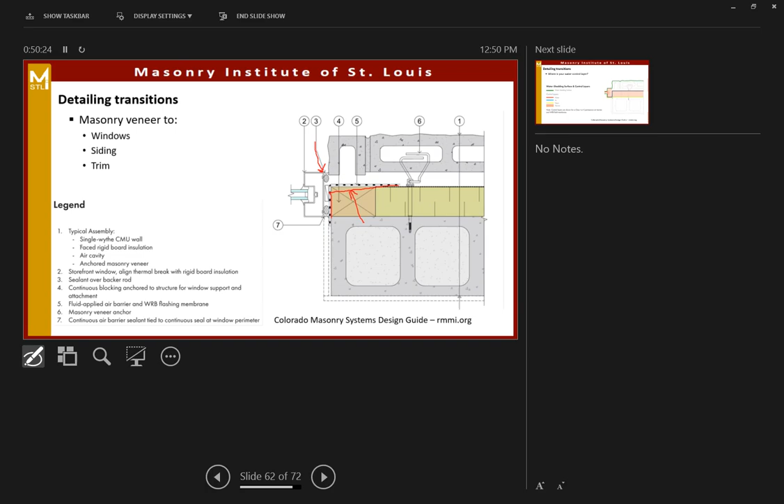I get a lot of people wondering, do I worry about water and air getting in behind the veneer? We know it's going to happen. We're designing our flashing at the base of the drainage cavity, designing in weeps, again to get that water out of the system. Our water and air barrier is at the back side of our cavity, right back in here.

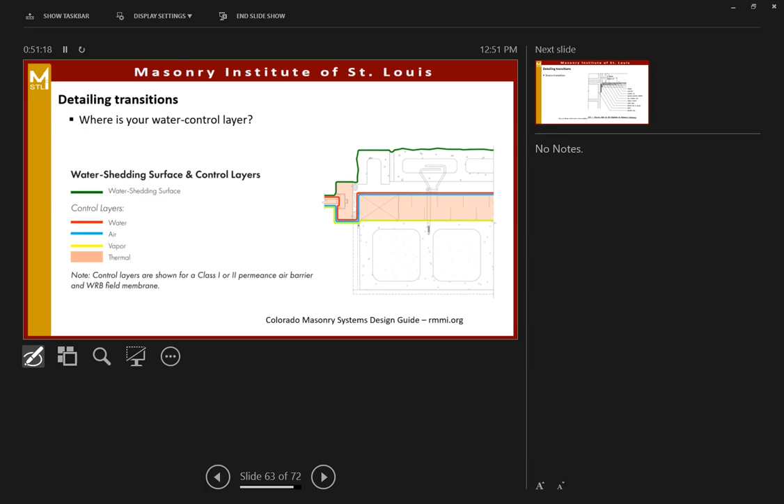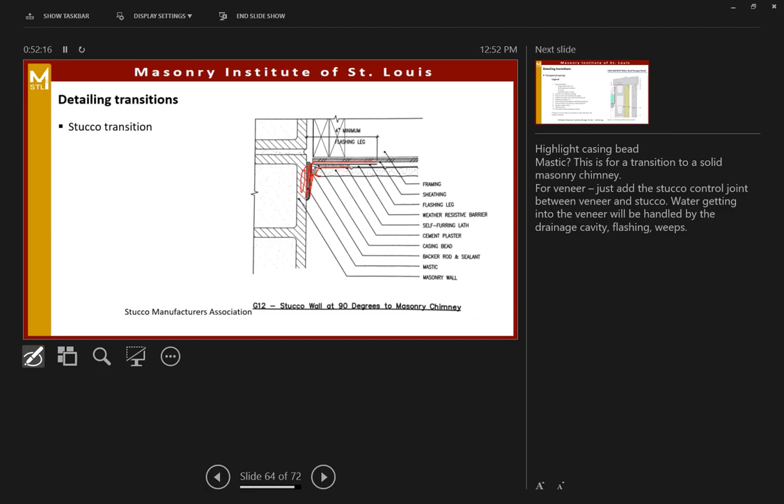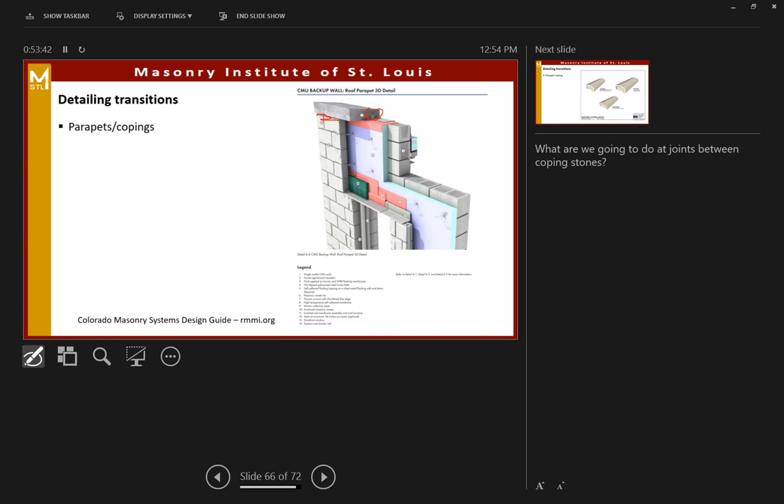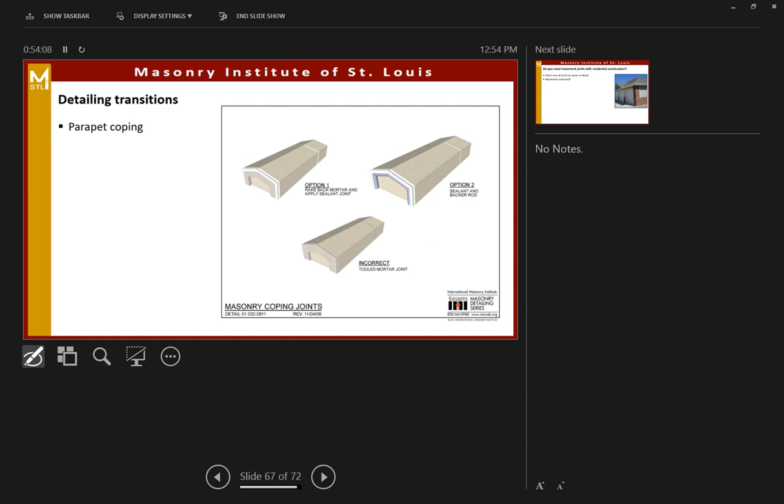I think a better solution is these top two options. You can put mortar in there, but rake it back and put a sealant joint with a backer rod, or don't even bother putting mortar in the joint at all—just sealant and backer rod. Again, the most durable joint is one that keeps out water. If we just put mortar between those wall caps like we see on the bottom, that's incorrect. Those joints will open up over time, let water in, and you'll see staining and so on.

So we've learned a bit. That's kind of my editorial comment—when I put a lot of this material together a couple years back, I was defending a lot of masons in our area for these things they're doing, because the movement joints and isolation joints aren't shown on the plans or elevations.

If you leave it up to the mason, they'll typically just put in a little mortar joint between the brick and the siding. Bless their hearts, they're trying hard and doing what they know how to do, but unless they're directed to do something different, like put in an isolation joint—a gap between the brick and the siding—they won't. Generally, they just butt the brickwork right up to the siding.

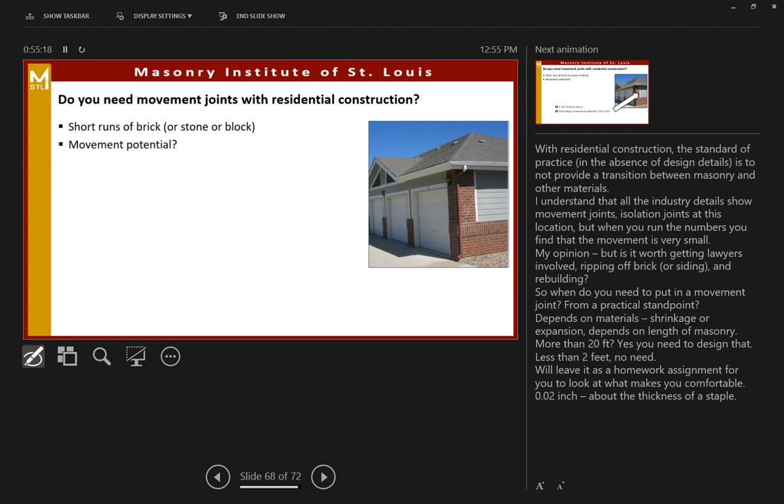A better solution is to design in an isolation joint. Do we really need it in all our residential applications? Well, we've been through the calculations. We've got 1 foot 10 inches of brick at this little return—otherwise, think multifamily residential, a big 100-foot-long garage unit. We can calculate that with 1 foot 10 of brick, the total design movement potential is about 2/100 of an inch—the width of a paper staple, not a construction staple, very very small.

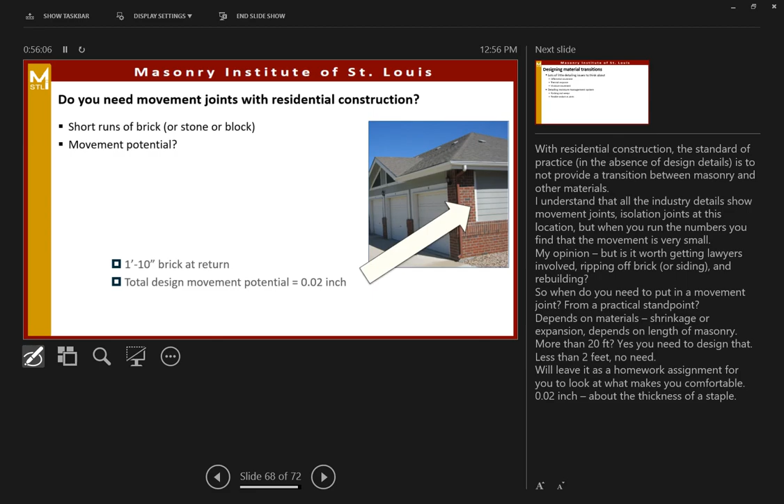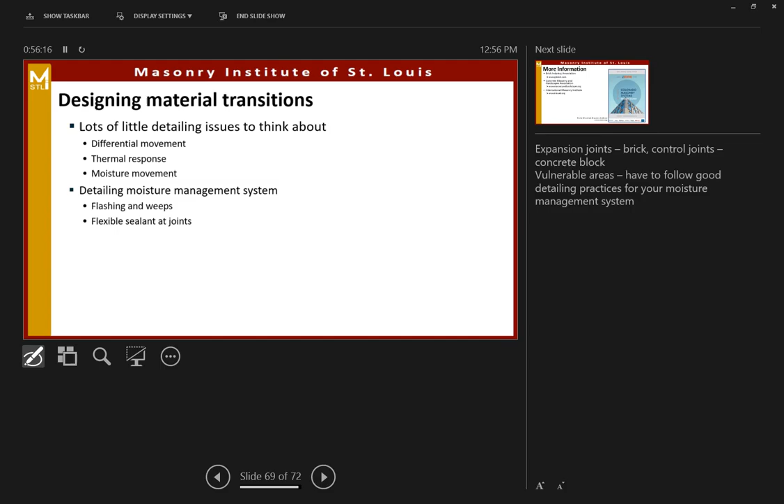So we can get by with a little movement—we're not going to damage the siding or the brick at that level—but we still have the potential for water to get in. So show it on your details and elevations: I want an isolation joint, 1/4 to 3/8 inch wide, with backer rod and sealant, to keep water out of that condition. Lots of little details to think about. We learned that brick expands, block shrinks, and we learned a bit about moisture management too.

There's some good info here—we looked at some Brick Industry technical notes, some CMHA tech notes as well, a couple details from IMI, and some details out of our Colorado design guide. Yeah, it's a lot of things to think about.